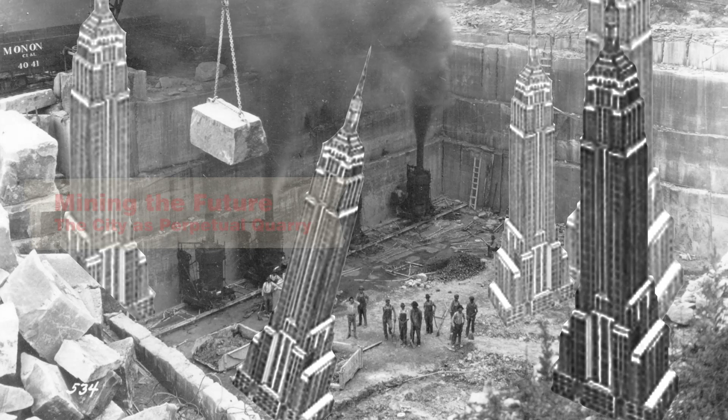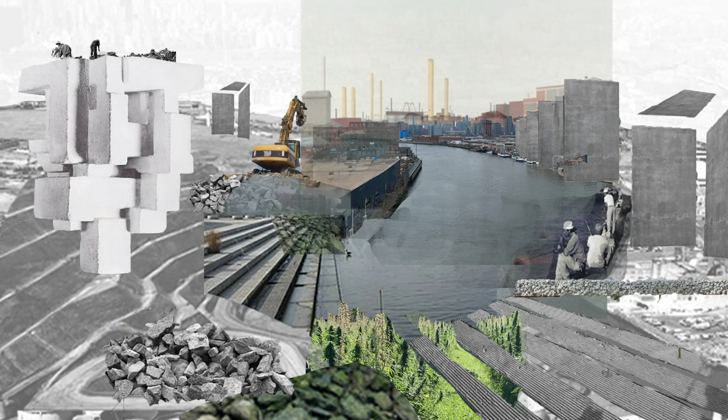Our project uses concrete as a lens to question the current life cycle of building materials and to reframe our city as a quarry, a site of continuous production and deterioration. We materialize Walter Benjamin's questioning of eternal progress in concrete, the material of urban growth, and ask how we can shift our practices to not only anticipate adaptation, but to design for it, to look backward and forward at the same time, and deny the finished state in hopes that creating a design continuum allows us imagination and foresight.

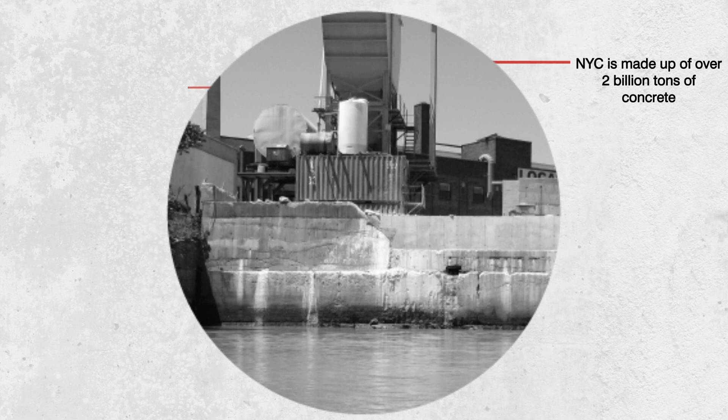With concrete as our primary tool, we look to Jane Bennett's Vibrant Matter to consider material as an active agent in the city. When we conjure an image of a typical modern city, concrete often makes up a large part of that image. Concrete jungle, concrete megastructures, concrete pavement. Concrete is everywhere. And in the architectural community, the material has come to be vilified as a relic of ill-intentioned modernist experiments, and more recently, as a contributor of 8% of the world's CO2 emissions.

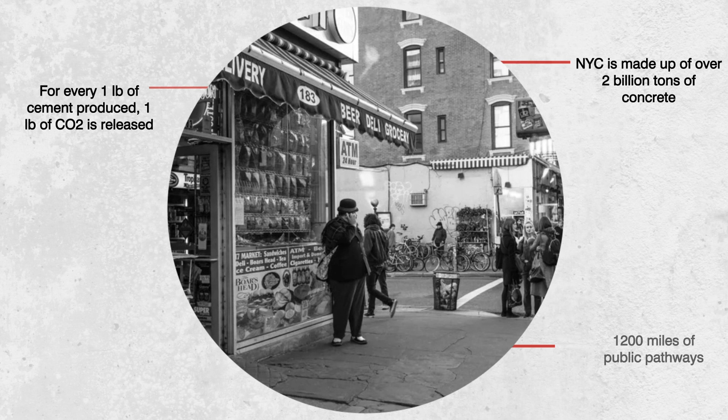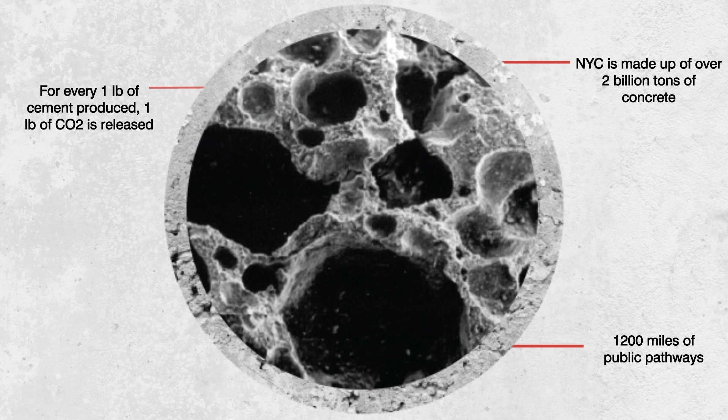As the most popular construction material in the world, its scale of production makes it an ethically and environmentally problematic product. Yet concrete isn't likely to go anywhere soon, and we don't want it to. It's a staple of our civic identity. It has allowed us to make major strides in engineering. Currently, material scientists are developing technologies that would make concrete more sustainable through an array of strategies, including substituting cement with fly ash and crushed recycled glass, increasing concrete's porosity, and even growing concrete using bacteria.

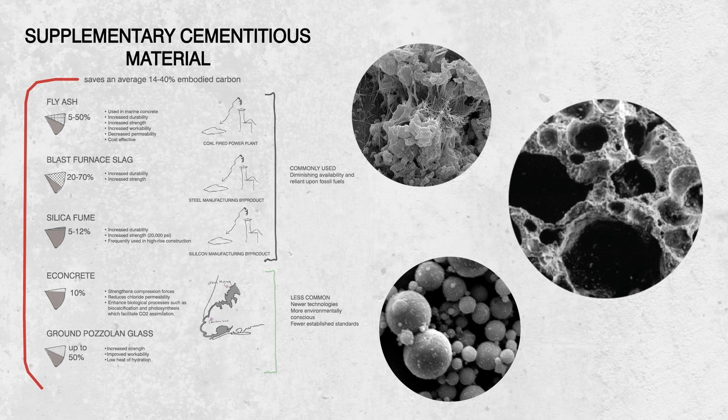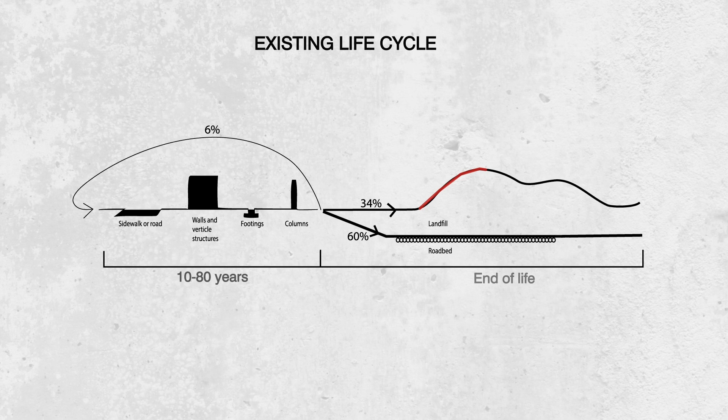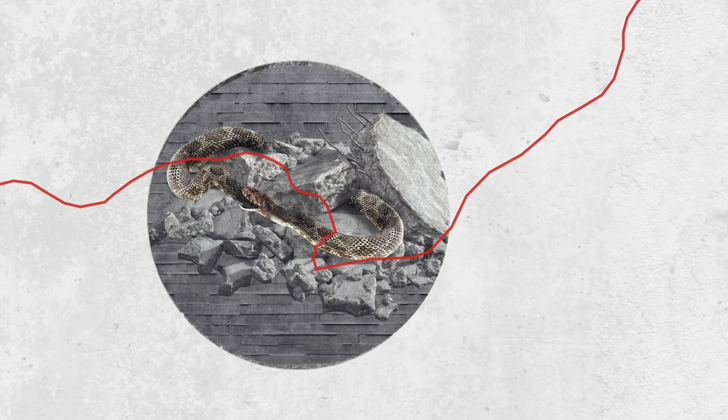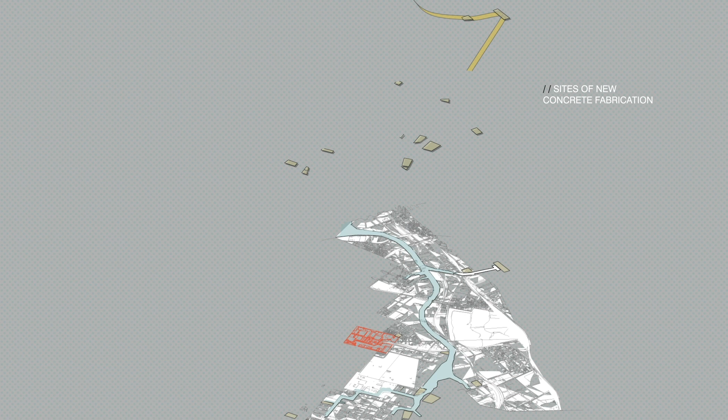These new technologies indicate that concrete can be an adaptable material. What if its life cycle could be extended? What if its deterioration could feed future projects and reuse designed into the concrete product itself? To explore this alternative timeline, we situate ourselves within Newtown Creek, a deindustrialized coastal site in New York City. We configure Newtown Creek's existing recycling, wastewater management, and concrete production sites to work as a large-scale device for our proposed cycle of production and deconstruction within the city.

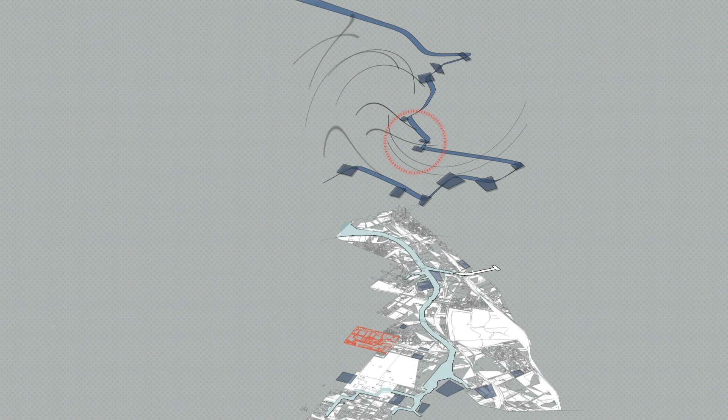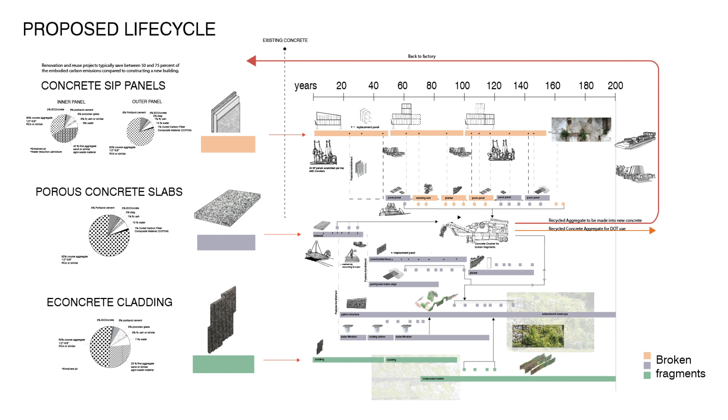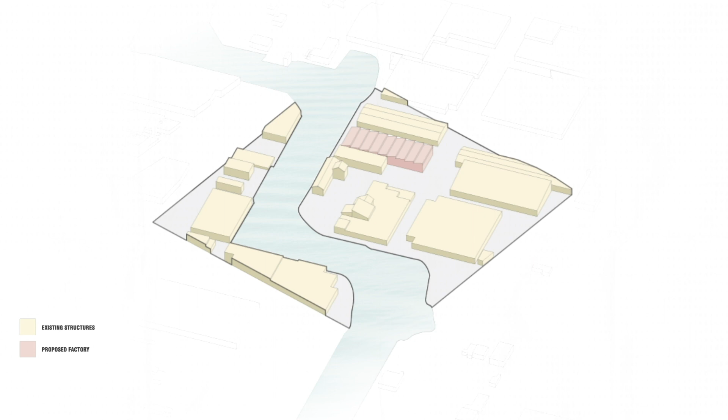We explore deployment and redeployments of concrete SIP panels, porous concrete, and ECOncrete cladding over time in the built environment, specifically in Newtown Creek. Engaging with the particularities of Newtown Creek, canal, seawalls, floodplain, factory buildings, and open vacant spaces, we approach the site as our stage upon which to experiment with extending material life cycles. This project is a continuum, a set of practices that transforms our site in Newtown Creek over time. In present-day Newtown Creek, existing factory buildings and vacant lots dominate the site. On our site, a precast concrete factory is the starting point of our process of design for disassembly.

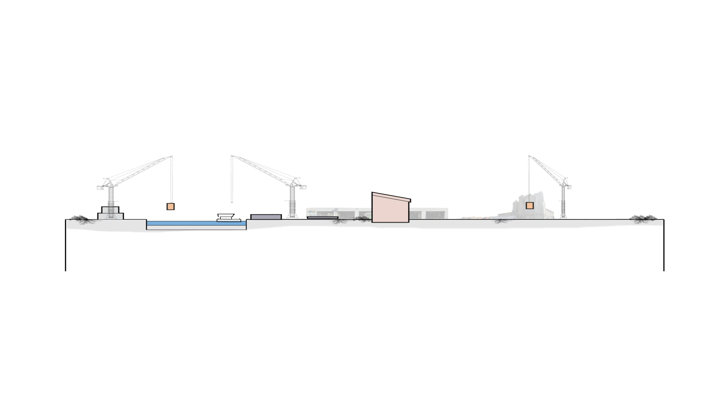Now let's project ourselves 30 years into the future, where a localized infrastructure has been established to deconstruct, transport, store, and manufacture the city's building stock as it exits its life of serviceability. Measures are put in place to divert material from entering the waste stream, to be redeployed in another form with another purpose. We use Newtown Creek as an experimental stage for new configurations of concrete, both new and reused, that allows contractors, architects, and engineers to build trust in these new processes and see how these materials actually perform.

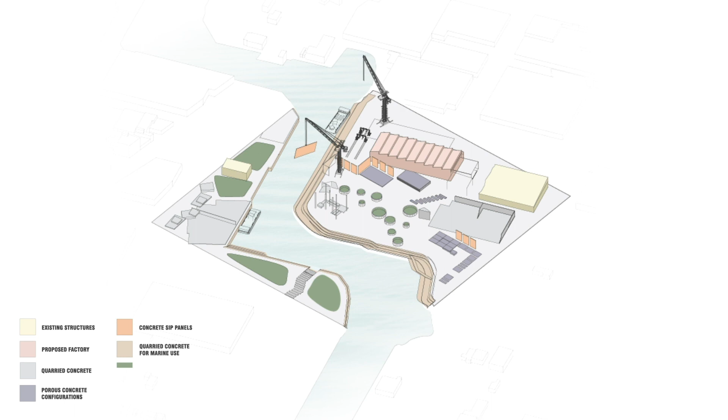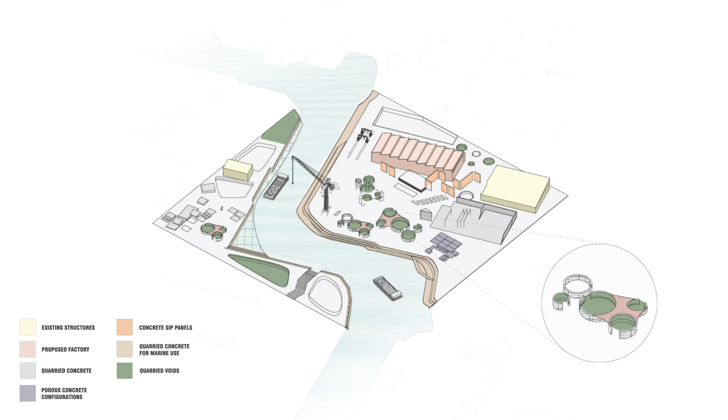In addition to the site functioning as a space for quarry and assembly processes, it can also serve as a site for production and regeneration. Smaller scale blocks and scrap concrete pieces participate in the transmutation of urban topography and function as a material in designing sites where new materials can be grown. In a speculative future where our collective consciousness is more concerned about carbon sequestration and sea level rise, the way in which we approach materials will shift from our typical understanding of sustainability. Building with ecological systems in mind and designing for uncertainty are integral aspects of the paradigm shift.

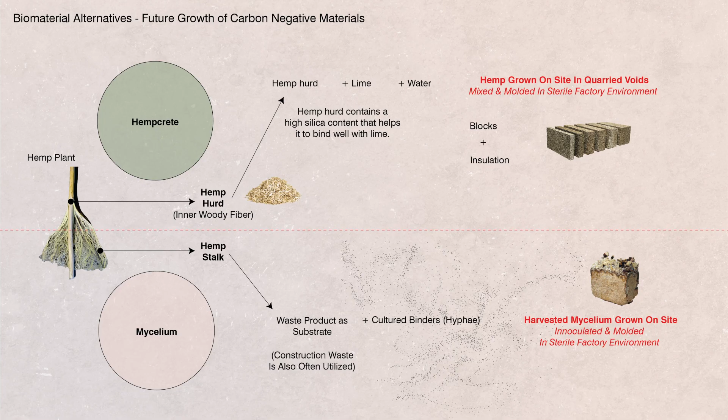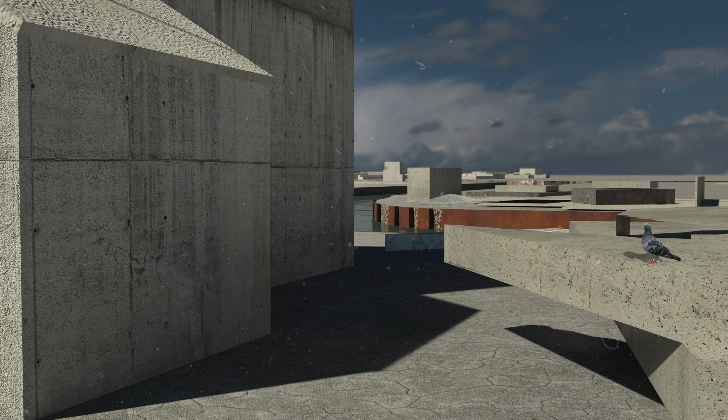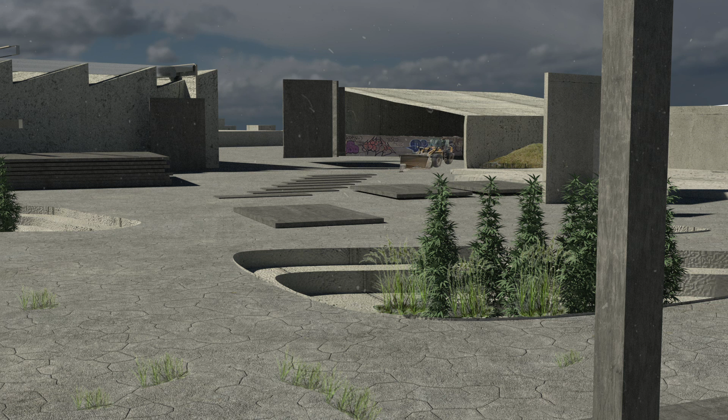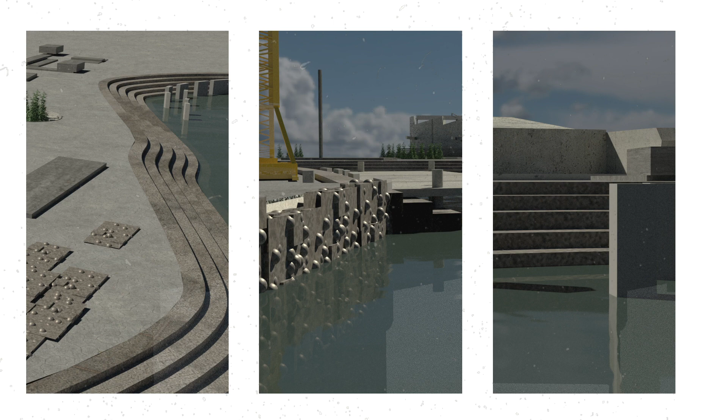We envision our site using waste material and hemp hurd to grow potential concrete alternatives, integrating new forms of labor within this system. The site is continuously becoming neither old nor new. It evolves gradually alongside the shifting values of our culture. And as environmental and economic systems transmute, so does the site. It maintains its manufacturing identity while fostering areas for experimental biomaterial growth at a local scale. Within this evolution, materials from the on-site factory are disassembled and repurposed at the creek's edge to encourage habitat growth, as well as the site's own adaptability to climate change.

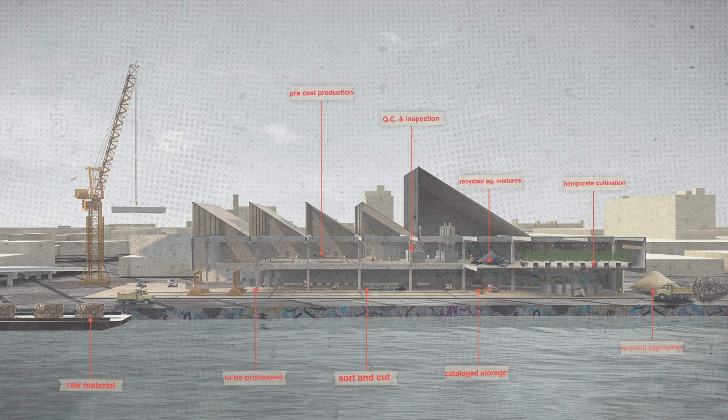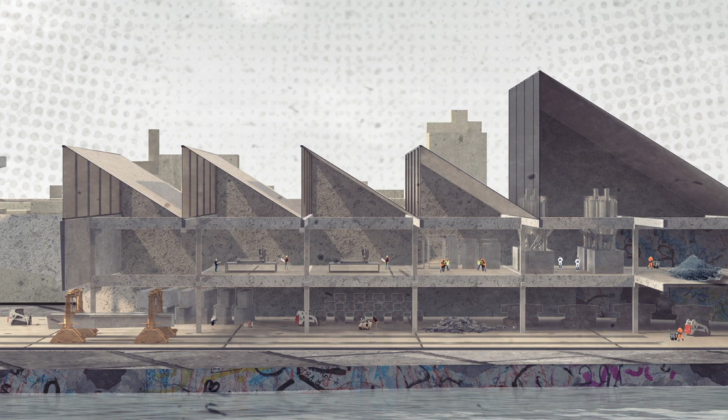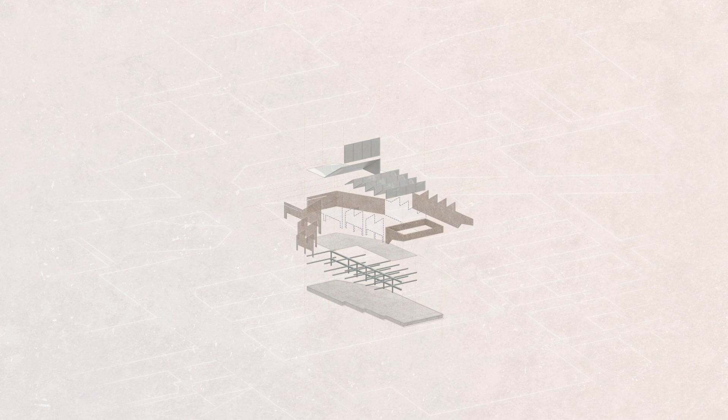The production and labor of this design for disassembly process is partially housed in a proposed concrete factory, where new material mixes are created and custom and standard precast slabs are assembled, disassembled, and broken down. The factory offers a more climate-controlled environment, safer working conditions, and more consistent material outcomes. Pieces are put onto barges and trucks and distributed to their next life within the city. The factory building is itself constructed of concrete SIP panels and clad in biophilic concrete panels, all of which use dry joints and are easily disassemblable to allow for their continued use in new contexts.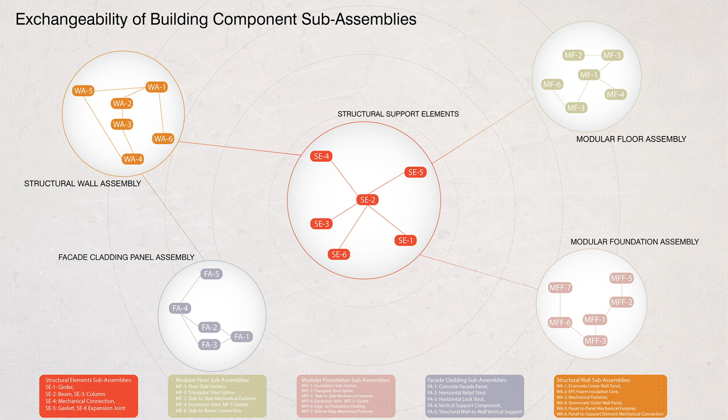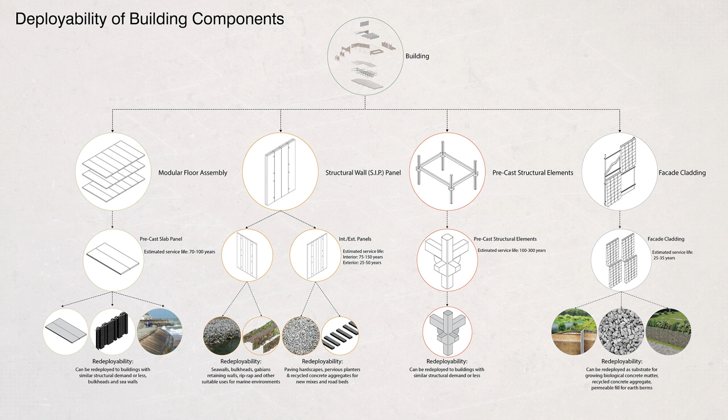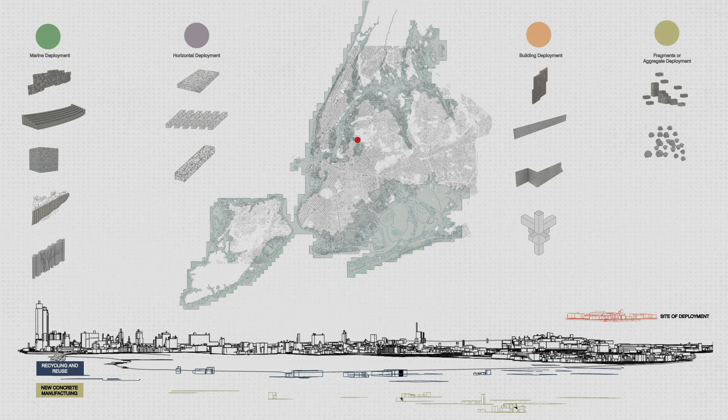Like a machine, parts can be swapped, traded, or reused depending on their design and function. As the material weathers and parts retire their structural capacity, they are designed to redeploy as various landscape adaptations or to feed new construction cycles. Mining the Future develops a system of urban remediation, a process of building and unbuilding that articulates the full lifespan of materials. Through quarrying the modern city for fragments of history to carry into the present, we honor the past and set the stage for a more complete, local, and sustainable future.